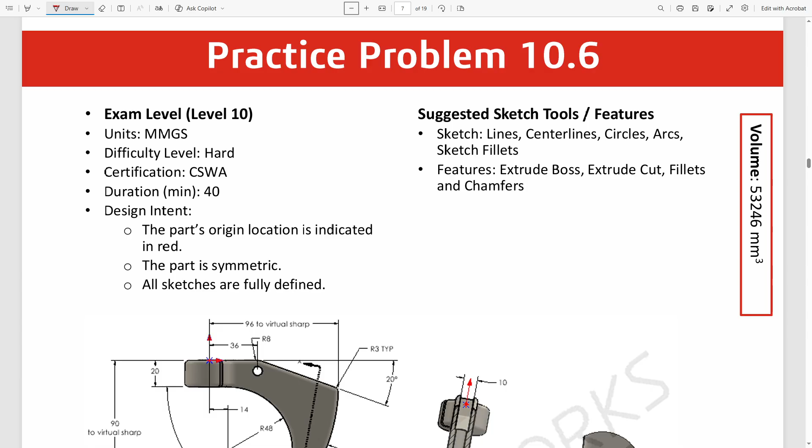So for this problem, I focused on the top view, creating this shape first. Let's go over to the top plane and get started.

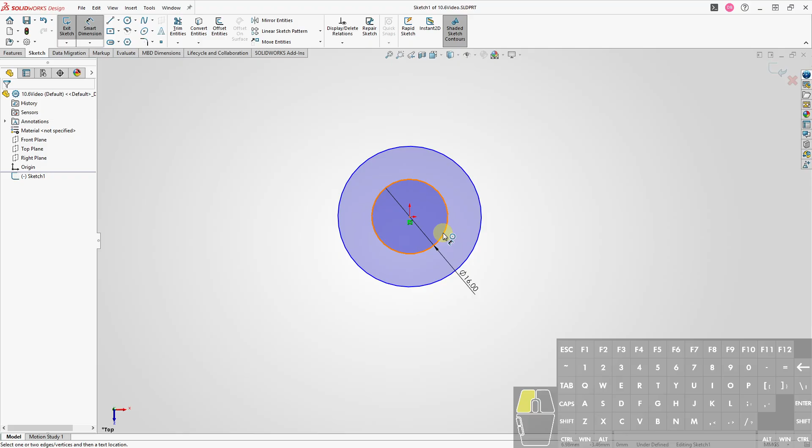Create a circle with diameter 16. Make sure that the spacing between the inner and outer is 10.

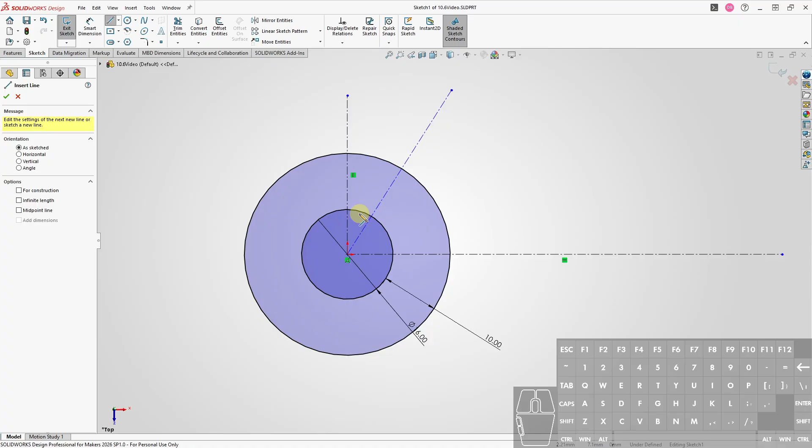Let's create some center lines: one going vertically, one at 30 degrees to the vertical, and a horizontal one as well. We can enter the line tool, create some lines from circle to circle, and then create these lines coming off to the right and back to the circle.

Let's set up this 30-degree relation right here. So this is 30 degrees. We want these two lines to be parallel and symmetric about this center line. Click on one, control click and click, make parallel, make symmetric.

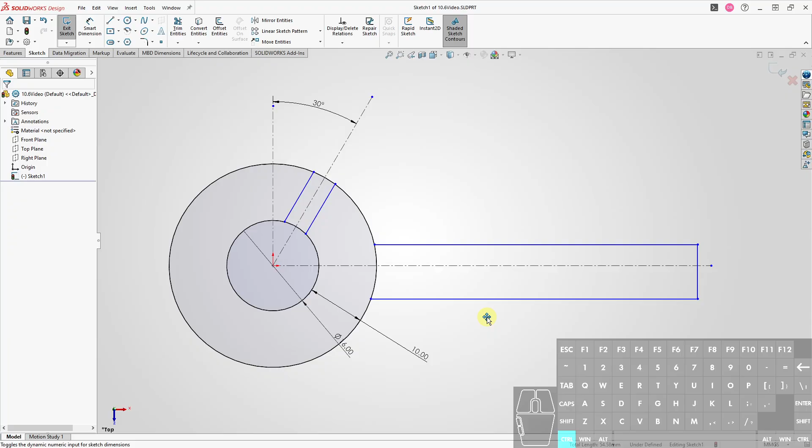Let's do the same with these guys. Click, hold down control, then click, click, make parallel, make symmetric.

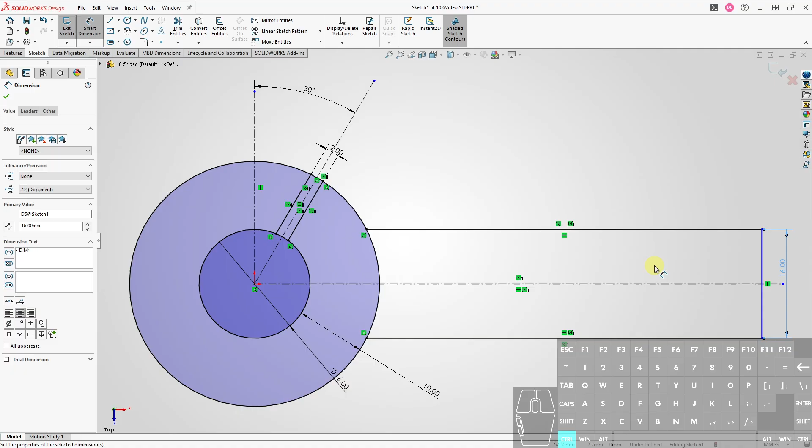Okay, let's start setting these dimensions. We've got this distance is 2 millimeters. This vertical distance is 16 millimeters. And then from the center of the circles out to the right side, that's going to be 96.

Let me show that to you in the diagram. So from the center of the circles to the right side of the solid is going to be 96.

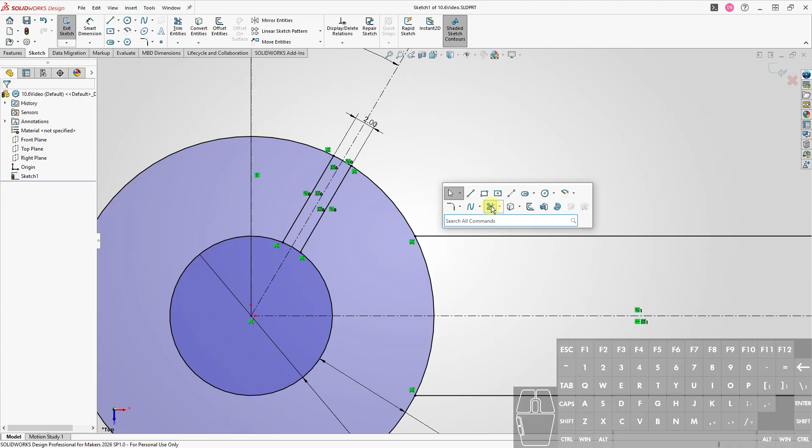Okay, so all we have to do now is a little bit of trimming. We'll trim, trim, trim, and we've got the top view shape that we want.

So now we can extrude. We want to extrude 90. I'll show that to you in a second. And we want to reverse the direction.

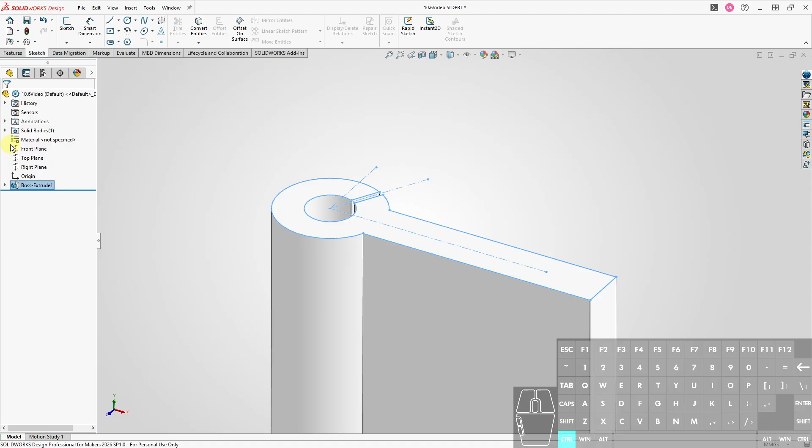So that's what we have so far. The 90 is coming from top of the shape to the bottom of the shape. That's the 90. And now we can focus on this contour, making this contour here.

If we can make this a closed contour, then we can do an extruded cut with flip side checked off. It'll make sure to cut everything outside of that closed contour. That's going to be our strategy here.

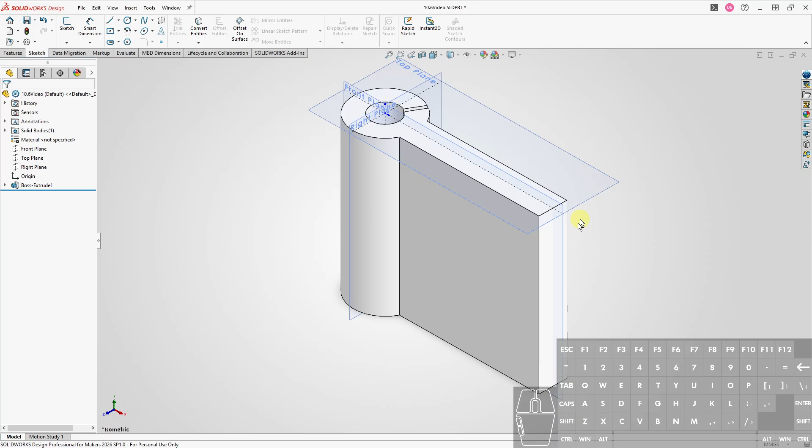So let's work in this front plane. I'm going to focus on the top part first. There's not too much going on the top, so let's get that all fully defined. There we go. So just this line, this line.

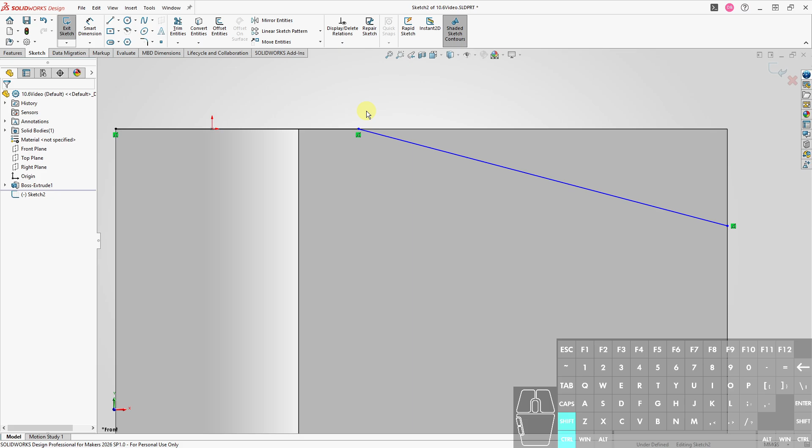The interesting thing here is that there's one fillet. I'll show it to you here. There's a fillet with radius 8, and that's the only fillet that has radius 8. So I'm going to add that to the sketch.

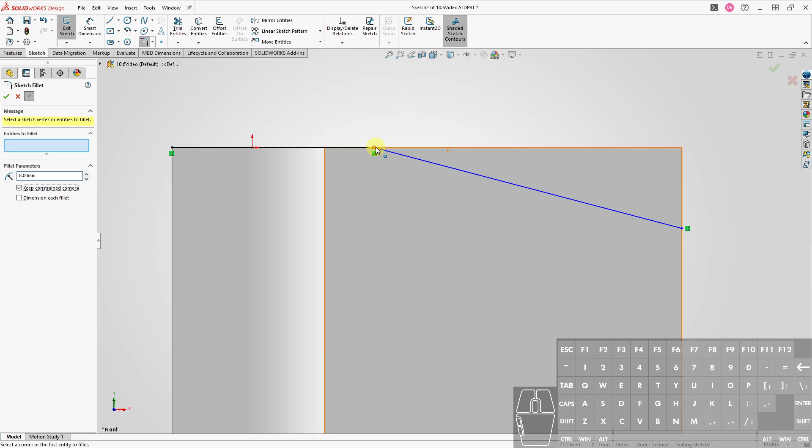A lot of times I like to do fillets in 3D, but I think in this particular case, it's probably better to do it in the sketch. So let's add that fillet in there. It's got radius 8. And the angle between these two lines should be 20.

And now there's another dimension, which is this 36. So the fillet here that we created is an arc that has a center. Just by looking at this picture and seeing how this circle should be located, pretty much the only place it could be located is at the center of that fillet arc, so that it's concentric with that fillet arc.

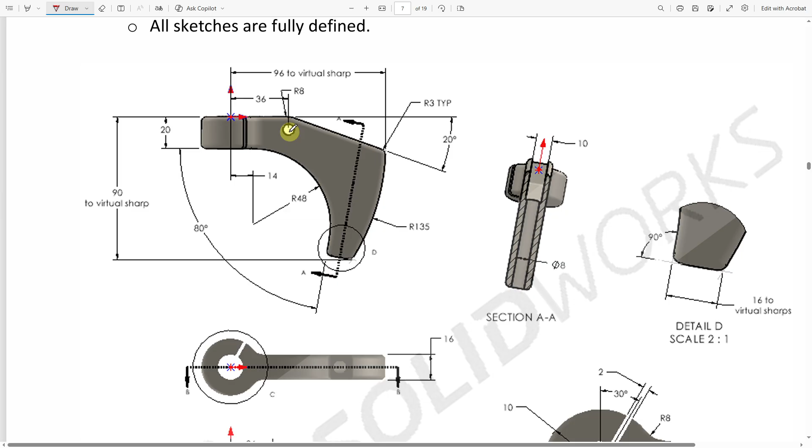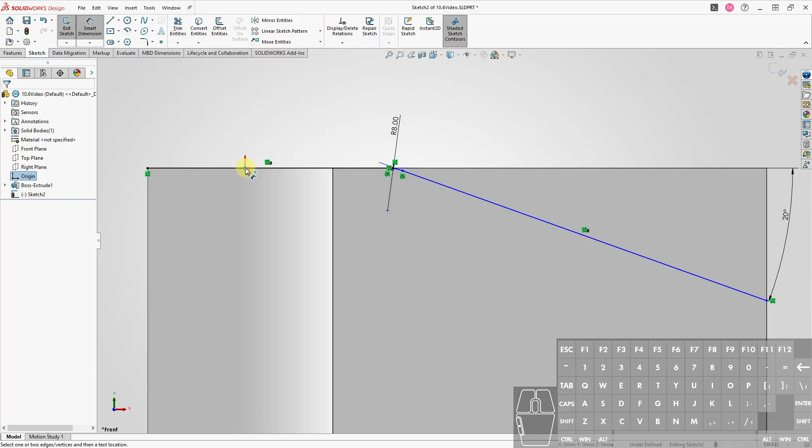So now that we have the fillet, we can make that horizontal distance from the origin to the center of the fillet 36, and that fully defines the geometry we've created so far. As long as we've been talking about all this, let's make sure we have this circle, which has a diameter of 7, concentric to the center of that arc.

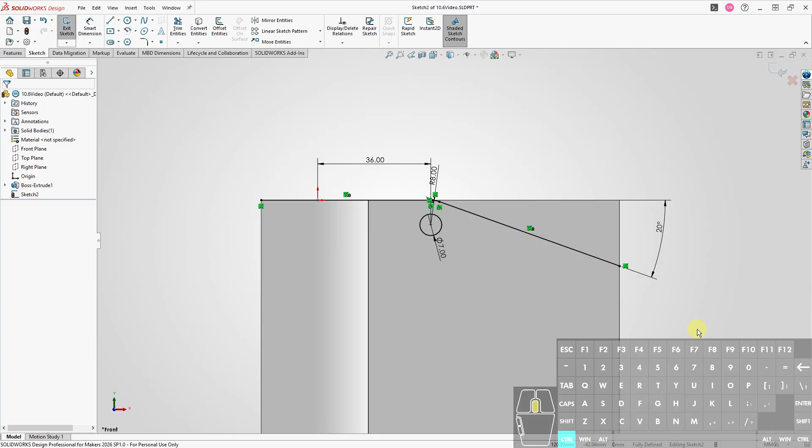Okay, let's continue on. We'll create a little line that goes down here. Oops, I think I just accidentally set up a coincident relation. Let me undo, create that line again. Okay, I want it to be coincident to this edge, but not to this point over here.

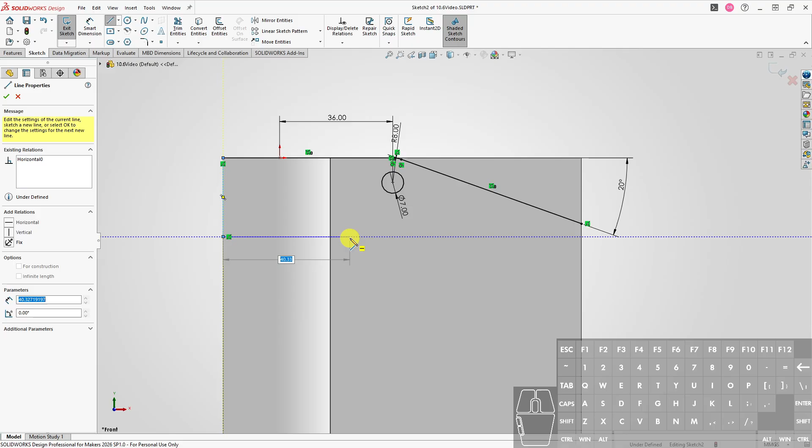Okay, and then I'm going to create a line here, out and in to make an arc. So some kind of arc, and then go tangent off of that arc. And this line segment right here, we're definitely going to need. Oops, I just turned into an arc. All right, I'll exit the line tool, re-enter it again.

So let's come off perpendicular to that, and that'll be good for now. We'll finish off that other arc on the right side later.

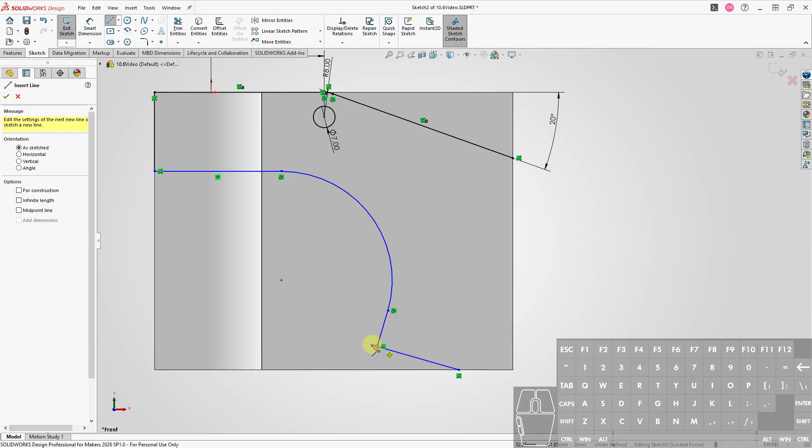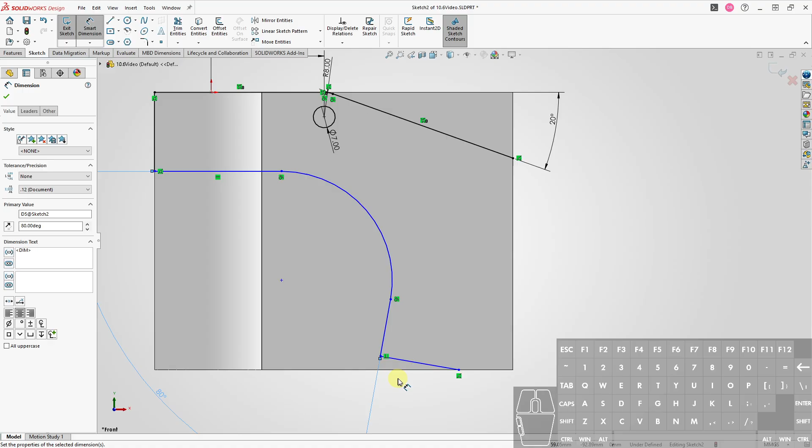So this line here is hard to see from the picture. It's hard to tell if the arc goes all the way into this line or not, but it turns out you're going to need that in order to, number one, create the angle between this line and this line. Though technically you could create the angle from a line that's tangent, like a construction line that you make that's tangent to this arc, but it's going to make sure that you're able to fully define the geometry by having this line here. So not totally obvious. It's kind of an assumption that you have to make, but when you get stuck, you realize you have to put a line there. Okay, so let's put some more dimensions here.

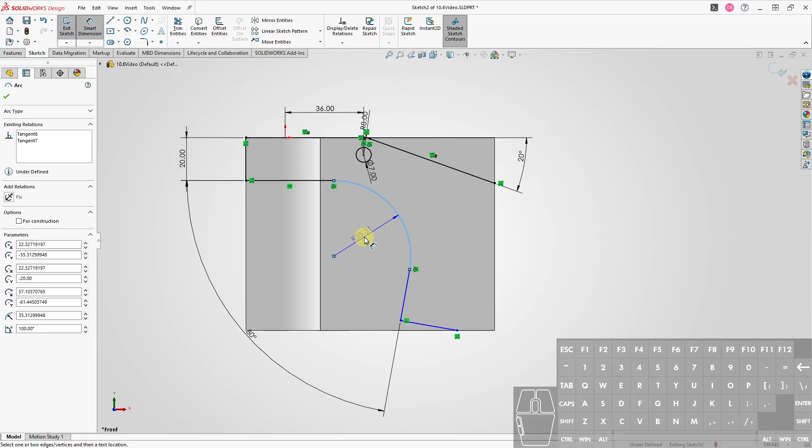This is 20. The arc has a radius of 48. And the distance, the horizontal distance between this arc center and the origin should be 14. That's coming right here. So from the origin to the center of that arc, horizontal distance there is 14. On the bottom here, that distance should be 16.

So let's set that dimension, not the horizontal, but the actual length of that. I can right click to lock the dimension, and then I can center this a little bit better. So click, left click, and then 16. Okay, fully defined, looking good.

So all we have to do is create a 3-point arc from here to here. And I've got auto dimensioning on, so I'm just going to type in 135, hit enter, and there we go.

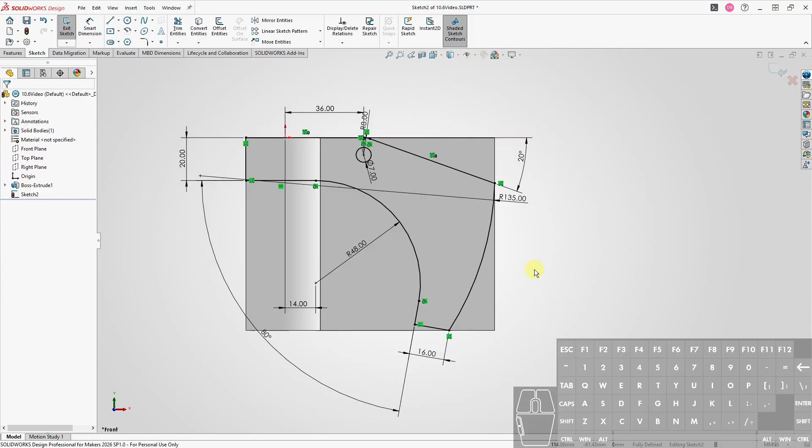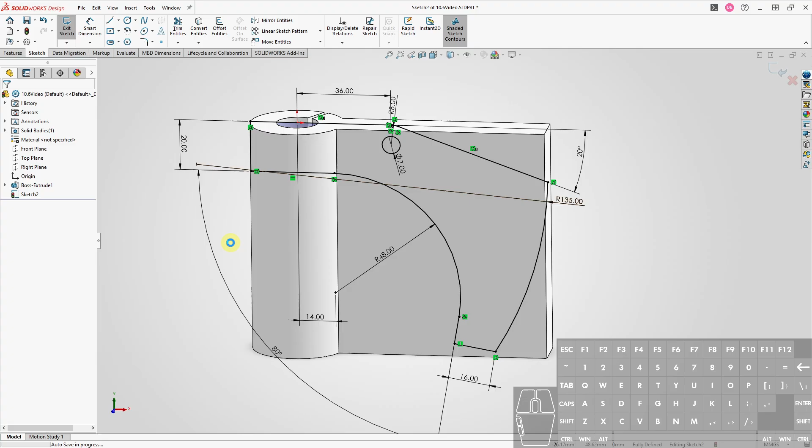Now there are some more fillets. There are radius 3 fillets here and these corners here. But if we make those fillets now in the 2D sketch, it's going to mess up the shape. It's going to mess it up because there's this cylinder here. And when we make those fillets, it's going to cut away the cylinder in a way that doesn't look very nice. So we're not going to make those fillets now. We'll save those fillets for later when we can use the 3D fillets and tangent propagation and all of that stuff.

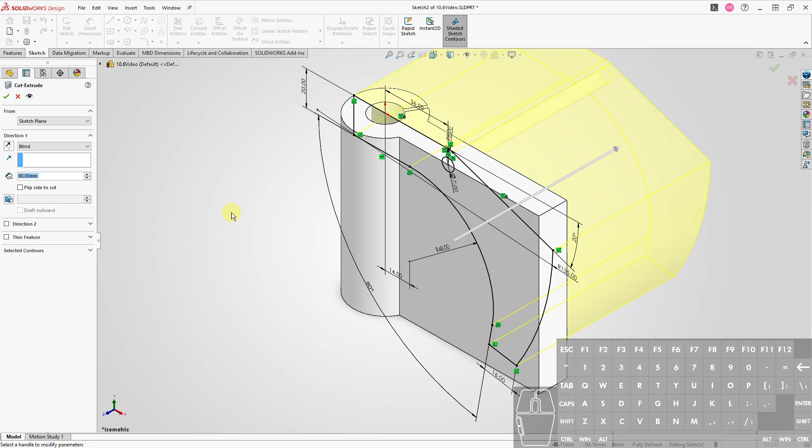So, all right, so we're going to then make our extruded cut. We're going to cut in both directions through all, and we're going to flip the side to cut so that we're cutting outside of that contour. And that'll also make sure that we cut away this little circle right here. Okay, so looking pretty good.

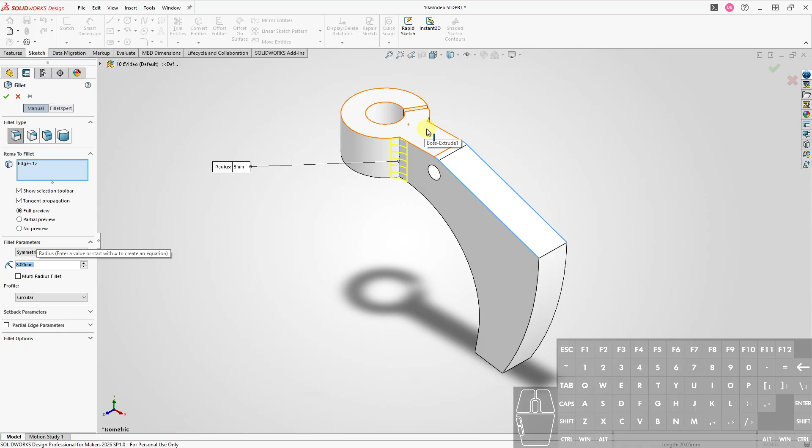Now, one thing I'm going to do, usually I don't do fillets too early, but I'm going to do this anyway. I'm going to add these fillets in before I forget. These are 8mm fillets here and then right here. Oops, I accidentally selected the face. That one right there. I think I selected the wrong thing again. Okay, let me just go over here and select that guy. Okay, so add those fillets in.

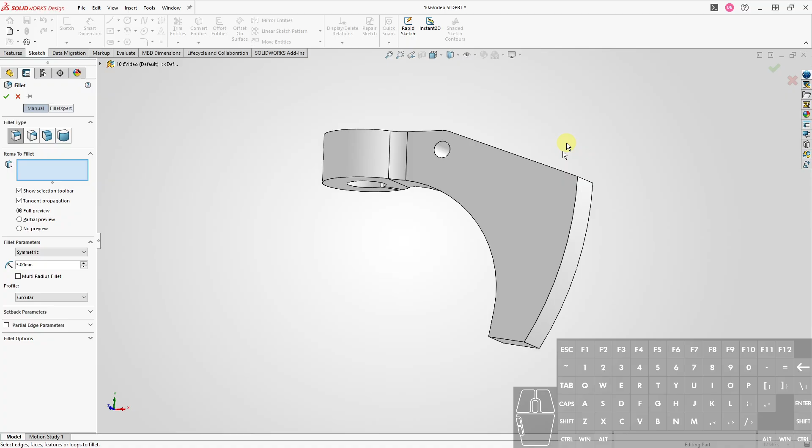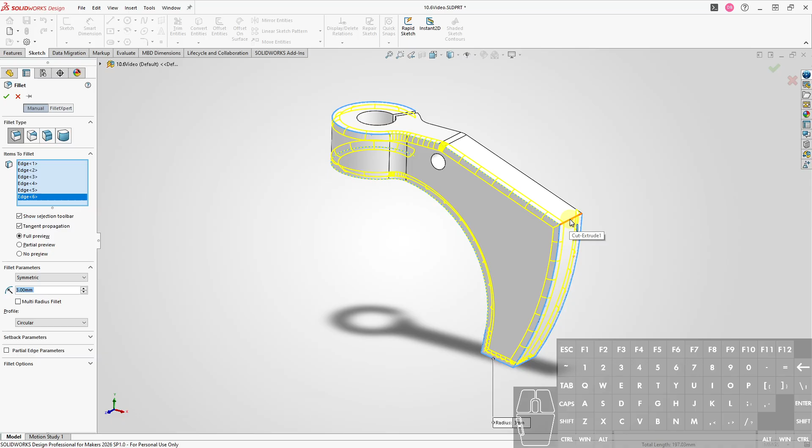And you know, while we're at it, let's go ahead and just add the rest of those fillets in too, the 3mm fillets. The two cuts that are remaining, the cut on the bottom that goes through all, and then this mid-plane cut that we're going to do, those two don't really have any fillets going on, except for maybe this one might have a couple of fillets, but we can just add those in manually. But let's go ahead and get these other fillets going. So let's get the bottom ones and going around here and going around the top here, here and here and here and here, here.

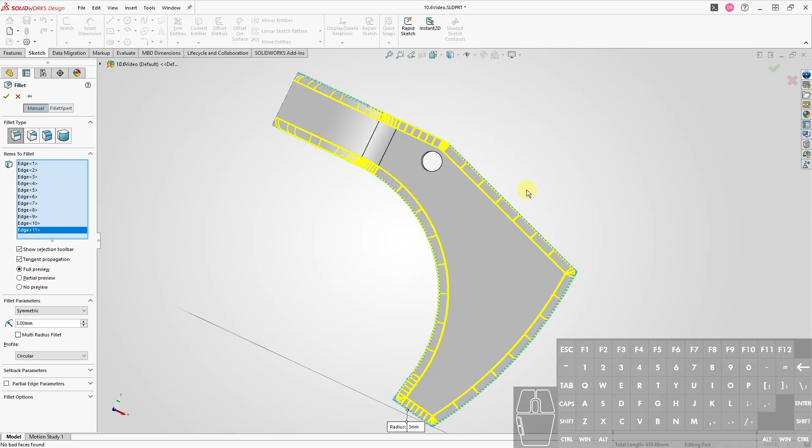Make sure everything's going on here. Okay, that's looking pretty good. Oops, except we missed one right there. It almost escaped. Okay, so now we've got our 3mm fillets.

Let's take the bottom face here and edit the sketch. We're going to convert entities to bring this to the forefront. Click on this and make it for construction. This way we're going to be able to locate the center of this square, and that's going to be used to center our circle.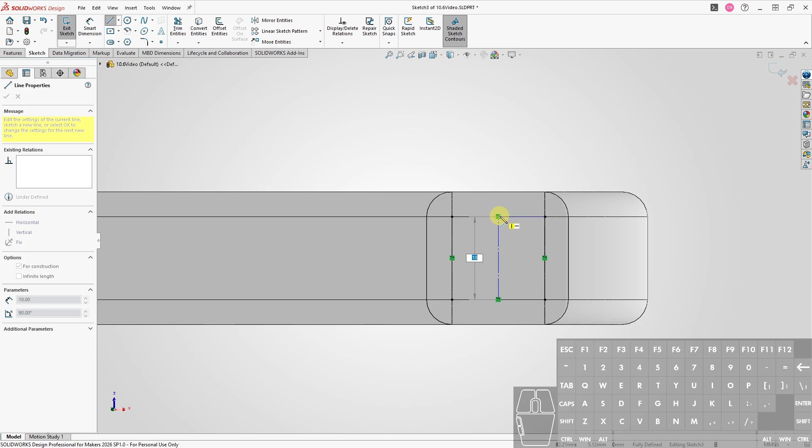Let me make another construction line from the midpoint of one of these to the midpoint up here, and let me just make sure I got the midpoints. This one doesn't seem to have locked on, so I'll drag it out and back in. Okay, so that's midpoint, midpoint. And I'm going to create a circle right here at this midpoint with diameter 8.

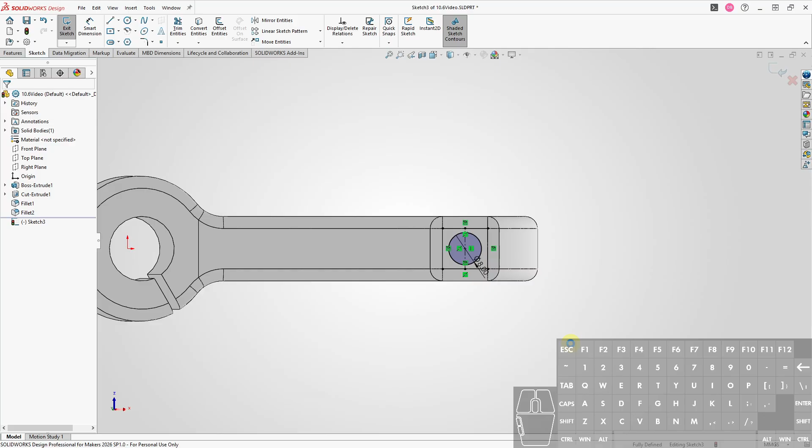And then I can make the cut. So through all and both is fine. It's hard to tell that this cut is perpendicular to this face, but really there's not much else to indicate how that cut is made.

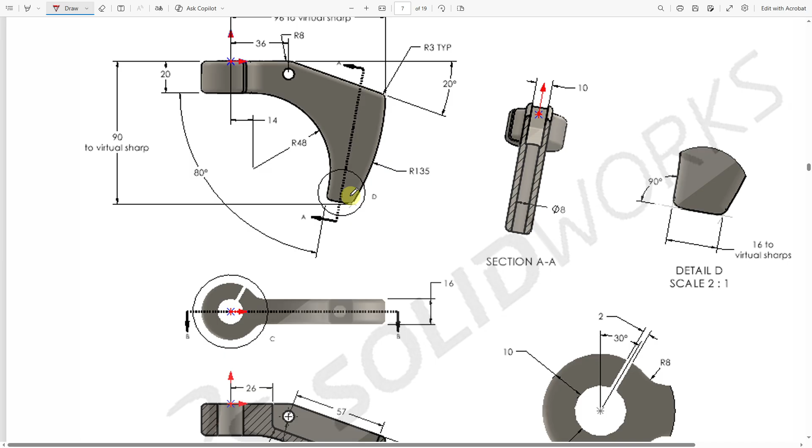If you look at this cut, we know the diameter is 8, but it's hard to tell if this section right here, this section AA, is parallel or perpendicular to this face. It kind of doesn't really look very perpendicular, but what else can we do, really? So here it looks a little bit more perpendicular. Anyway, so we've cut this tube.

So now let's focus on this cut right here. The way we're going to do this is draw these lines first, make them fully defined, and then draw some extra geometry outside to close the loop.

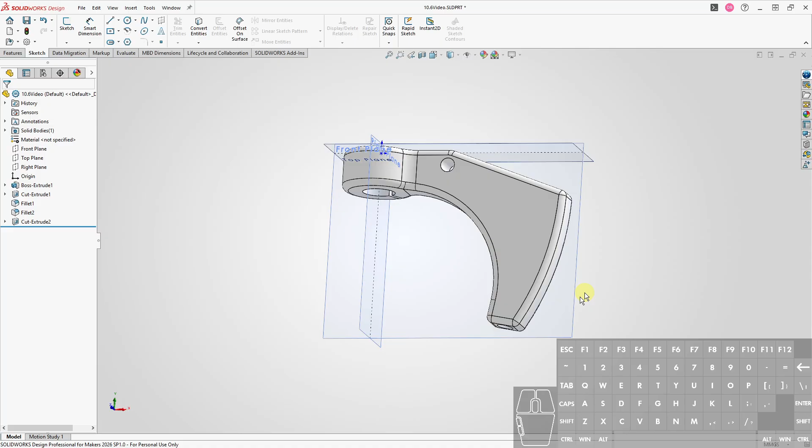So we're going to work in this plane and start creating, let's see, from somewhere around here we'll go down, over, and then perpendicular up to this edge here. I think I didn't quite get the perpendicular relation that I wanted, so I'm going to force it.

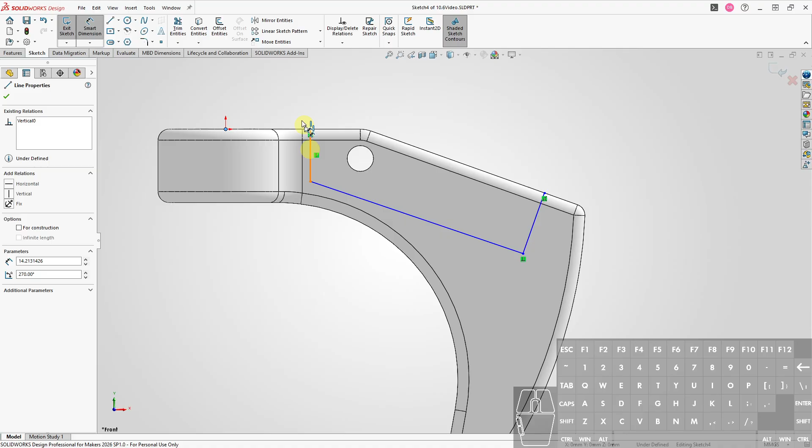There we go. Okay, and we know that the distance from the origin horizontally to this vertical line should be 26. We also know that this length should be 18. And one more thing is that this line should be parallel to this line here, this edge. That's not totally obvious, but we want that to happen.

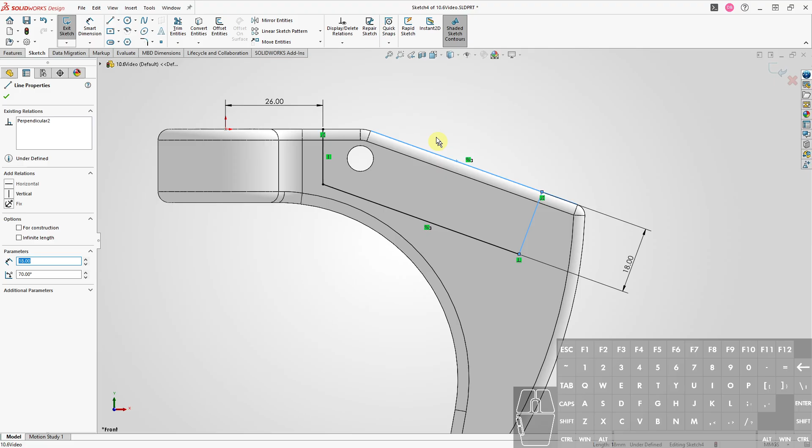So the only thing left is that we can move this line in and out like this. There's a dimension to lock that into place, which is this 57, but we need that to be relative to the center of the circle.

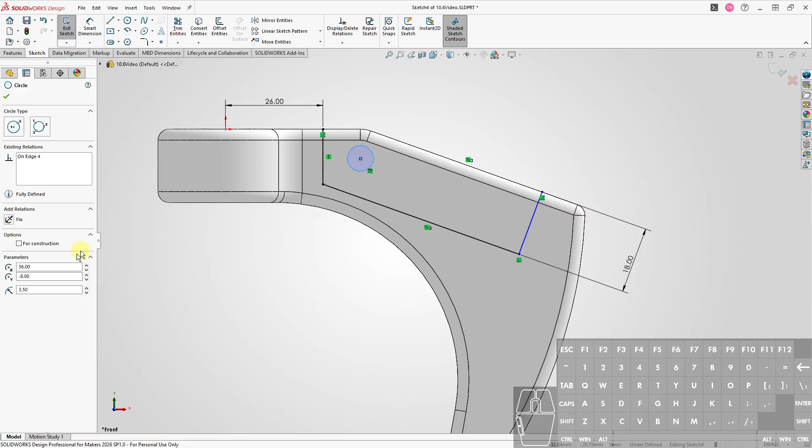And when I mouse over this circle, this edge, it doesn't wake up the center like it does sometimes. So I'm just going to click on the circle, convert entities, click on the circle again for construction only, and now we have access to that center. So from the center to this line is 57.

And we do have those fillets of radius 3, so I'm just going to build these in at this point. Let me switch over to the fillet tool, add those fillets with radius 3 here and here, so we don't forget about them. We could have done those in 3D at the end, but that's fine too.

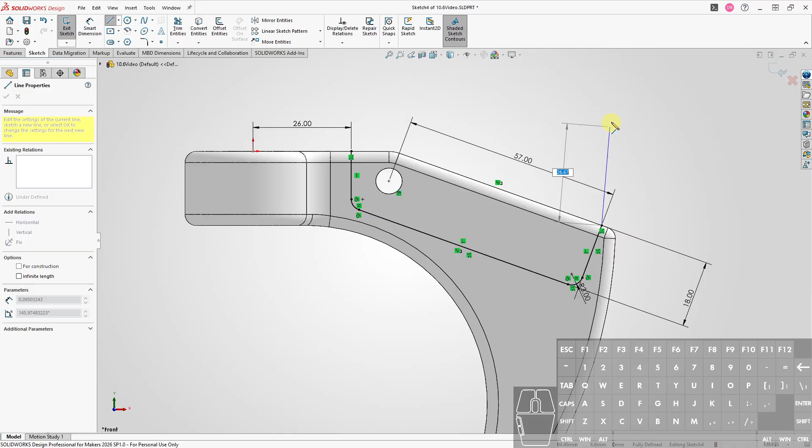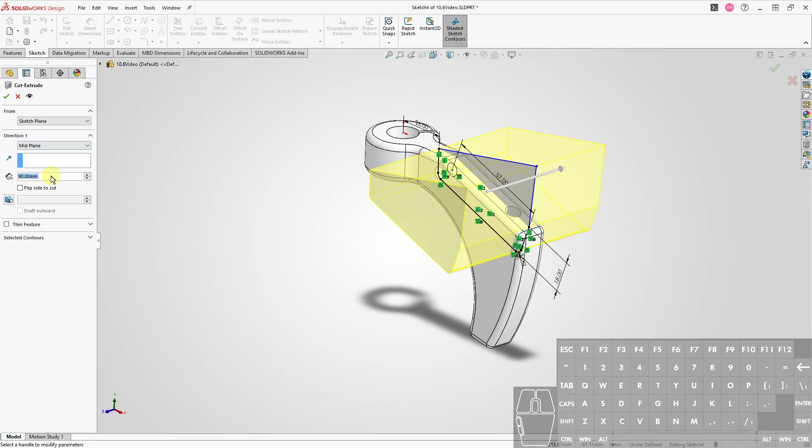So we're fully defined. Let's add a little bit of extra geometry going up here and over to here. This part doesn't have to be fully defined as long as we cover everything that we need to cut out. So then we'll make the extruded cut. We're going to use a midplane, and it's going to be 90. Okay, there we go. Now we've cut out this part.